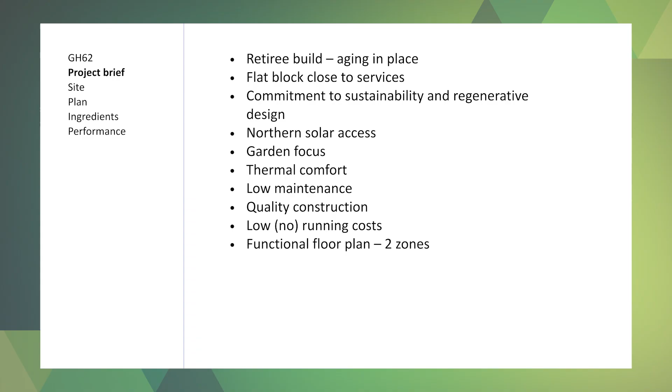The brief for this job looked a bit like that. We've done a lot of projects for early retirees, and we enjoy working with that type of client, because generally they know what they want, and they've got quite a lot of experience living in homes. It's a lovely thing to work in a team delivering something that really assists somebody in ageing in place.

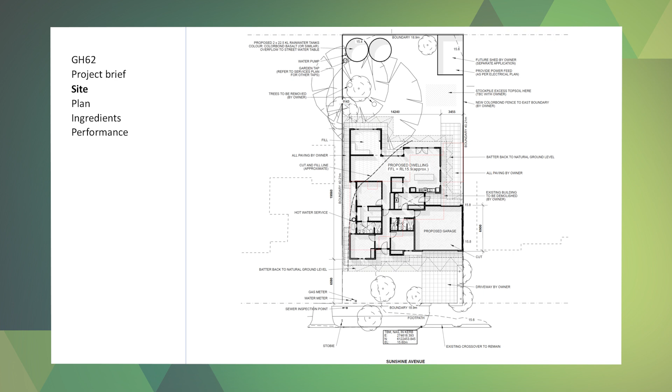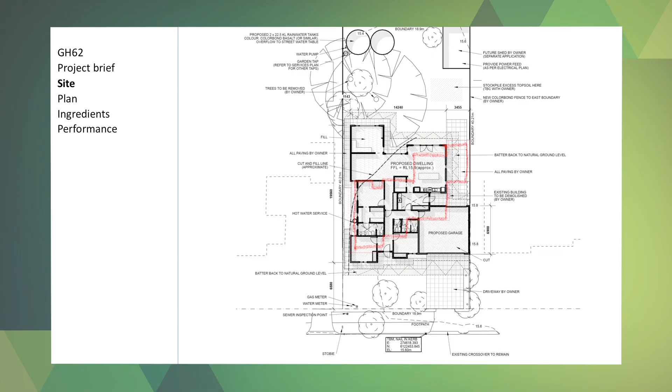So the site plan looks like this. There's the existing house. We're building a house that's a little bit bigger, but we managed to push it forward to the street as much as possible. Garage on the boundary. Living areas that address not only north and the solar access, but also the visual connection to the garden. Services on the east and on the west.

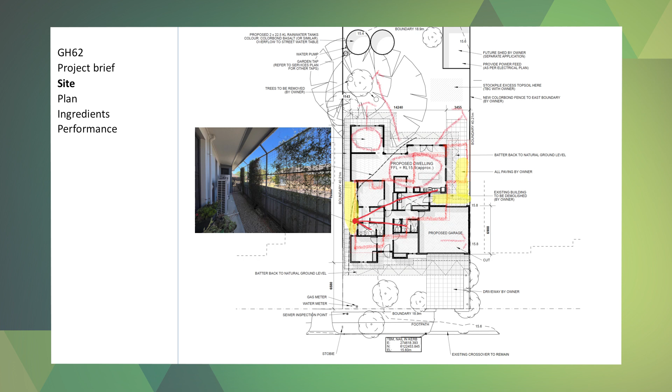We had to have some western rooms, so we've got a very, very deep overhang there, and some screening that is actually working really, really nicely - some green wall screening. The hot water system, we managed to get all of the services inside the floor plate, pretty close to the hot water system. So it's a pretty efficient sort of floor plan.

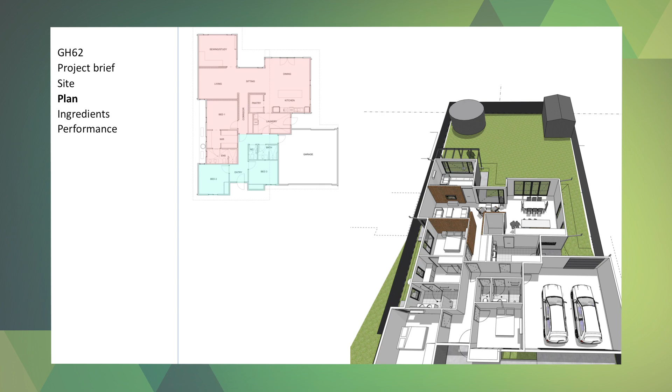The house is also designed in two zones - you can see the red and the blue there. Now, Ruth and James can essentially live in that red section, but part of the brief was that there was to be provision for future-proofing for a live-in carer or potentially a family member. So that section at the front, the 2 bedrooms and bathroom, is actually a separate unit, or can be a separate unit. So it's 198 square metres for the house.

And quite a large garage that you can drive through to the backyard. There's still access to the backyard and lots of storage.

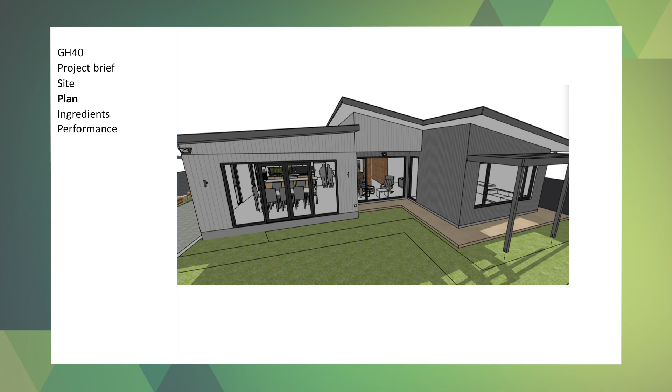Just a little bit on the solar stuff. I mean, most people would be over this, but it is actually always nice to see what happens in the winter. So this is 21st of June - that's the sort of solar ingress onto the floor plate, and then of course in summer we've got no sun getting into that floor plate at all, just with the eaves. But today is just a great example - here we are, 1st of May, and it's hot, we're getting a lot of sun. So there's these middle months, these shoulder months, that are actually going to become increasingly difficult to manage.

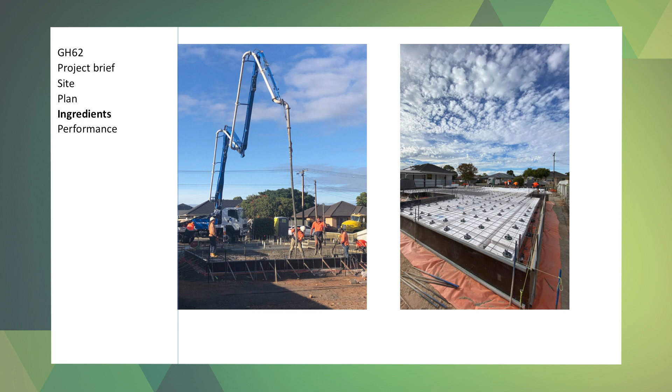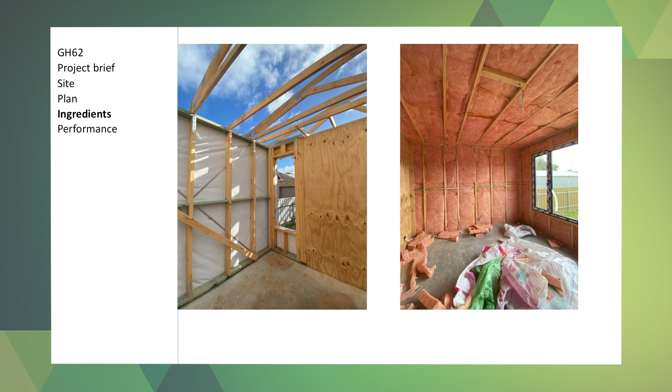Just a very quick thing on Good House ingredients - it's all very standard, happy to run you through the details if you're interested. But we use a waffle pod slab, which does decouple the slab to an extent from the ground, meaning that the thermal mass is working for the internal spaces. Oversized timber frame with ventilated air gap under cladding, R4 insulation in the walls, R6 in the ceiling. This is a pretty standard Good House, so you can get a very good sense of how that feels inside on Sunday if you're interested.

The performance of this is good - it's under 5 kilowatt hours per day, which is pretty typical for our homes. So the PV system is 5.5 kilowatts, and Ruth and James bought each other an 11 kilowatt battery for their birthdays last year, which I thought was probably one of the best birthday presents I've ever heard of. We're obviously going to be getting that data in over the next few years, but we're essentially seeing that that's going to offset all energy use. So it's entirely possible to do that now with the house battery and a high performance home.

I just want to reiterate that Good House is really only part of this story. Ruth and James recognise that they're part of a greater system here, and they did their research. They contacted us to assist them in this building element, but their overall picture was about regenerating the site - it's about biodiversity and produce from the garden, minimising water use. It was also about lifestyle and generally being efficient, being closer to places, walking more, having permeable front gates and fences so you can talk to people as they walk past. So it's just a lovely story about how they wanted to develop their life in their senior years.